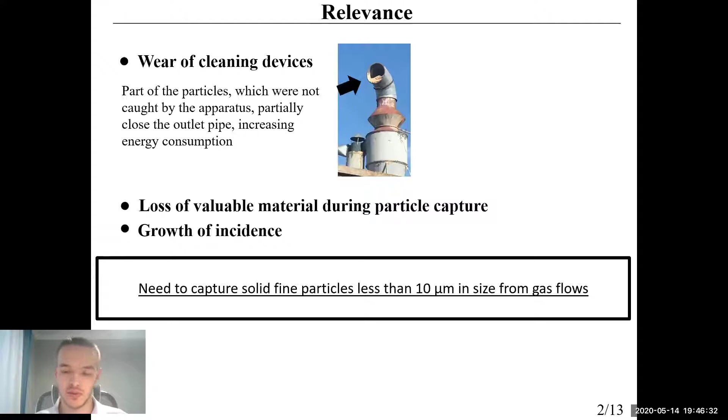Now gas emissions are cleaned from solids as follows. At first, gas is purified from particles down to 10 microns in size in devices of rough cleaning, such as cyclones and dust chambers. Then the gas stream cleaned from coarse particles comes to devices of fine cleaning, where fine particles less than 10 microns in size are removed. As devices of fine cleaning, electrostatic and bag filters are used.

A drawback of such an approach is that eventually devices of fine cleaning get clogged and their effectiveness falls. Hydraulic resistance of the devices also increases. There is a need for cleaning of devices or replacement of their expendables, which leads to a stop of the technological line of gas. These shortcomings decrease effectiveness over time and cause economic losses when replacing expendables and stopping the technological line of gas cleaning.

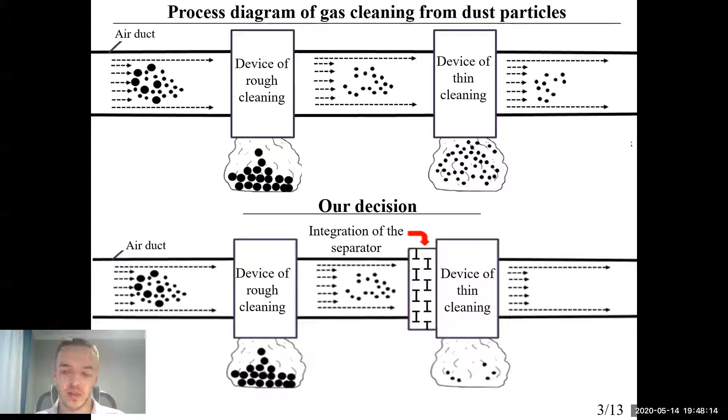Therefore, increase in operational endurance of secondary filters is an important task. To solve this, a separator has been developed, which is preferably installed before the device of fine cleaning, allowing to increase overall effectiveness and the endurance of devices of fine cleaning. The developed separator is presented on a slide.

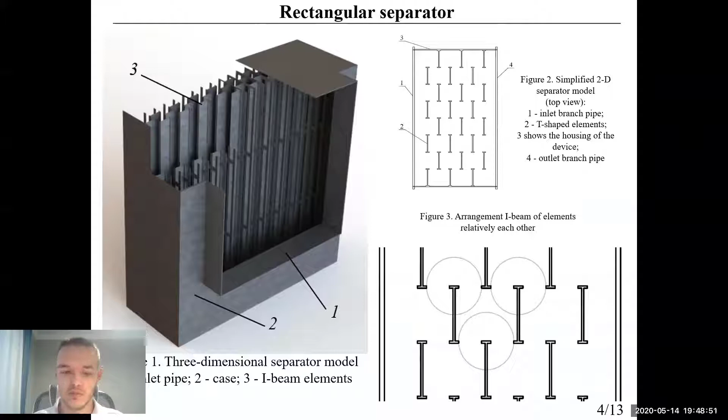Assembly of the device requires only 5 parts: plates, cross plates, housing, hairpins, and nuts. The blocks of T-shaped elements, assembled by inserting plates and cross plates into each other, form the basis of the device. Plates for the separator are made by bending metal, or printed on a 3D printer from plastic. Currently, a test piece of the rectangular separator has already been made.

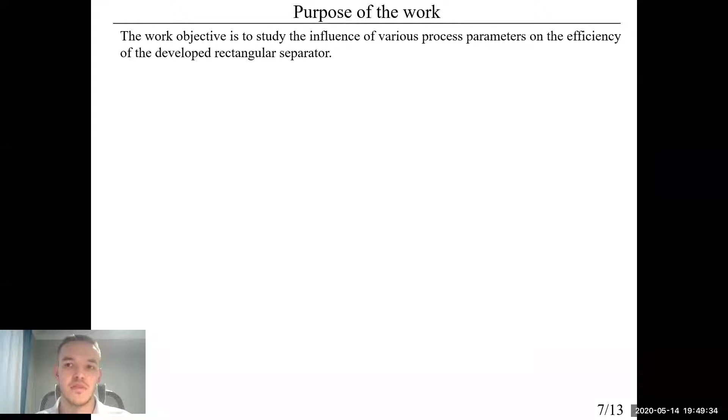The principle of operation of the device is that when a dusty gas stream passes between T-shaped elements, there is a centrifugal force throwing particles to the elements, thereby knocking them out of the structured stream. Particles stick to walls or settle on the bottom of the device, from where they are removed. The work objective is to study the influence of various process parameters on the efficiency of the developed rectangular separator.

Development and creation of the separator was done by numerical calculations and pilot studies. Numerical research was conducted in the ANSYS Fluent software. When determining optimum ratios between constructional elements of the device, the fixed parameters presented on the slide were set. To define an optimum ratio between the length of T-shaped elements and their ledges, a non-dimensional coefficient K was introduced, determined by formula 1 as the ratio of the ledge of the T-shaped element to its length.

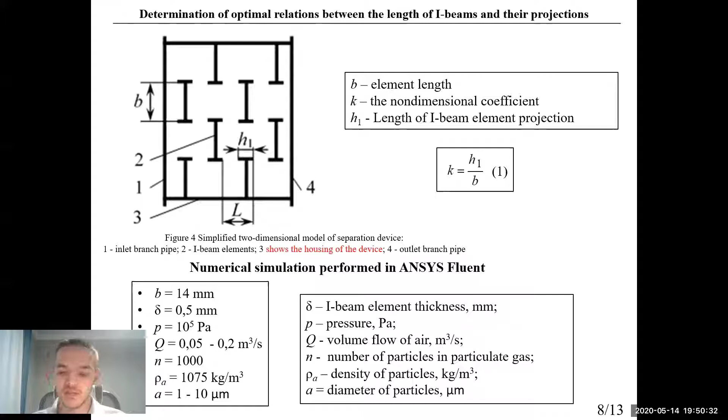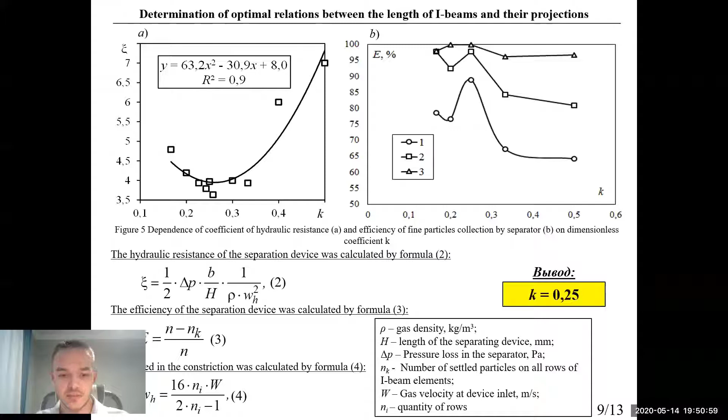During numerical modeling, an equation was obtained whose solution showed that at K equal to 0.25, the maximum efficiency at minimum hydraulic resistance is reached. That is, the length of an element has to be 4 times larger than the ledge length. Also, various forms of elements were considered: T-shaped, P-shaped, and arc-shaped elements.

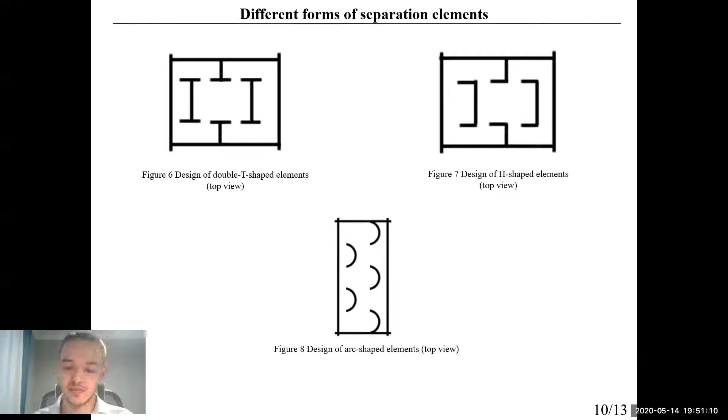During the analysis of the obtained data, it was established that there are 3 modes of the rectangular separator. The first mode at a gas stream speed up to 10 meters per second. The second mode from 10 to 15 meters per second, which is transitional to the third. And the third mode at a speed more than 15 meters per second.

Hydraulic resistance of the rectangular separator also depends on the form of elements, T-shaped, arc-shaped, or P-shaped. At a gas stream speed up to 10 meters per second, which corresponds to the first mode of the separator, hydraulic resistance of the device is on average 14, 15, and 16 when using arc-shaped, T-shaped, and P-shaped elements, respectively.

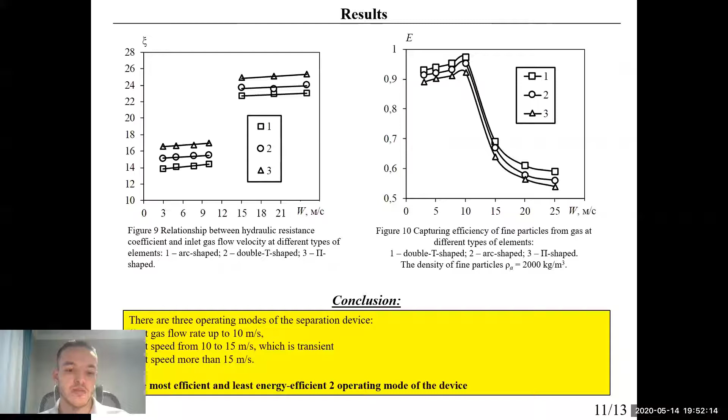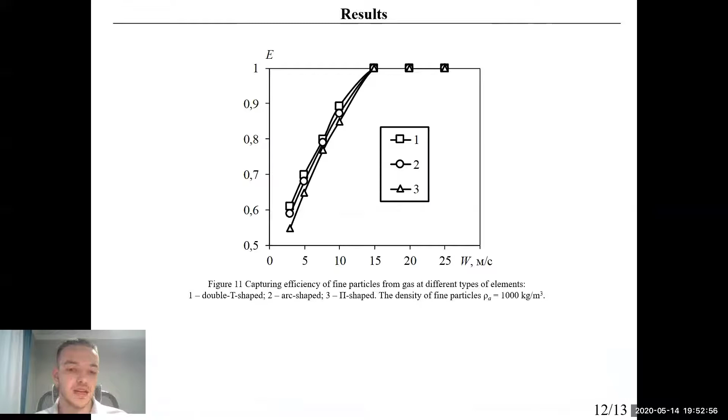The efficiency of capturing fine particles with a density of 1000 increases as the inlet gas velocity becomes larger. At a gas flow velocity of up to 15 meters per second, the average efficiency obtained is 75, 73, and 70% for T-shaped, arc-shaped, and P-shaped elements, respectively. For gas flow velocity over 15 meters per second, the separation efficiency of fine particles in the rectangular separator is more than 99% with any shape of the elements discussed above.

3 operation regimes of the separator are specified depending on the gas flow velocity, which affects the efficiency of capturing fine particles from gas by their density. The most effective gas flow velocities for capturing fine particles are less than 10 meters per second, since these values correspond to the first separation regime, and hence its hydraulic resistance is minimal.

In the case of separating particles with a relatively low density, for example, density equal to 1000, it's recommended to add several rows of elements to the separator, which increases the device efficiency at gas flow velocities up to 10 meters per second. When gas velocities exceed 15 meters per second, the hydraulic resistance of the separator increases by 36% on average, which is a much larger value compared to adding 1 or 2 rows of elements.